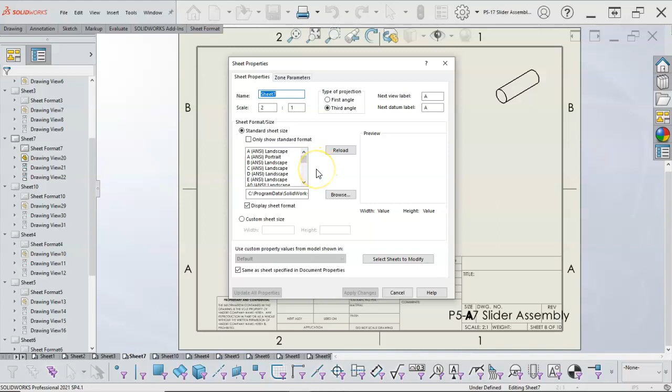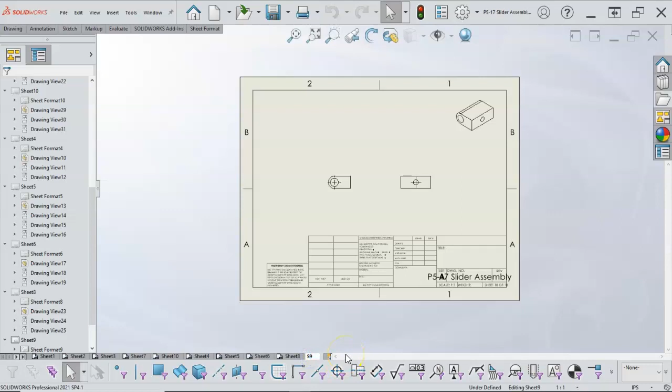What happens is the sheets get a little bit out of hand, taking over the bottom here. So sheet 1, 2, 3, 4, 5. Since I know that that is sheet 9, I could rename it to S10, and then go through, right click, rename S9, and shorten up those names to end up with quite a few more tabs.

In the process, even though they didn't start out in that order, I'm putting them so they're pretty much going to follow the order I'm setting for them. So S6, and then S5. You get the idea.

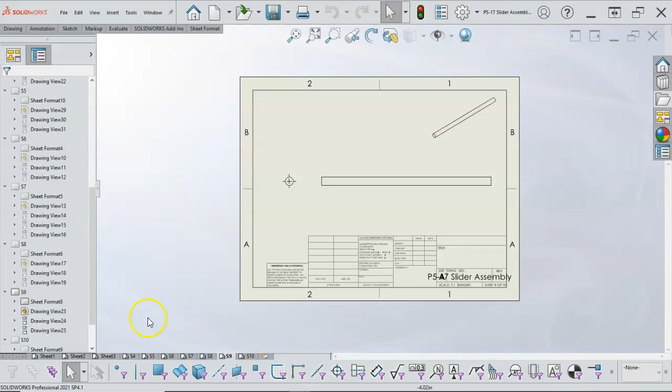All right, so going through that process of organizing it—we're really not setting anything in stone here. So the next step would be to get some basic dimensions in place.

Now when we're going through the options, let's see where that's at. If we go to model items, there are model items that come in, and I think it was probably more on the support that we saw that. So in our list of things we can import, marked for drawing—well, we uncheck that, and a lot of our dimensions are in purple instead of black because they're not automatically marked for drawing.

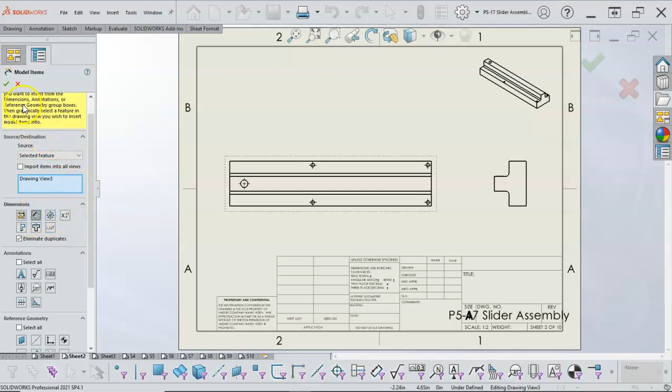But this would be the place that if I had that notation, I'd want to check for it. So maybe something like 'not marked for drawing,' and let's see what that gives—just import from. All right, so we got a few of the dimensions. Notice it's converting from metric to standard.

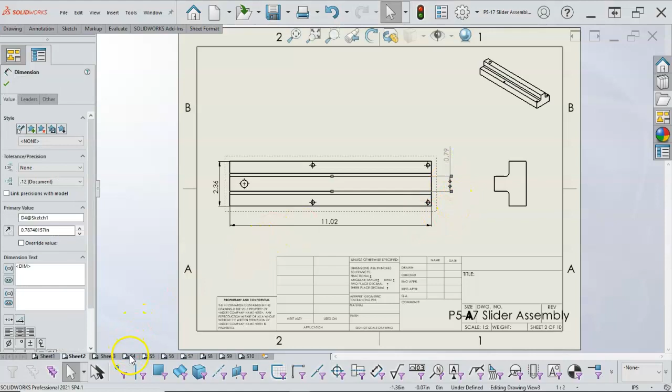So let's jump over to that support. In the annotation, model items, we'll just leave it for the marked for drawing. Maybe I didn't mark them—okay, so we got some of the dimensions. Could probably lay that out a little bit better.

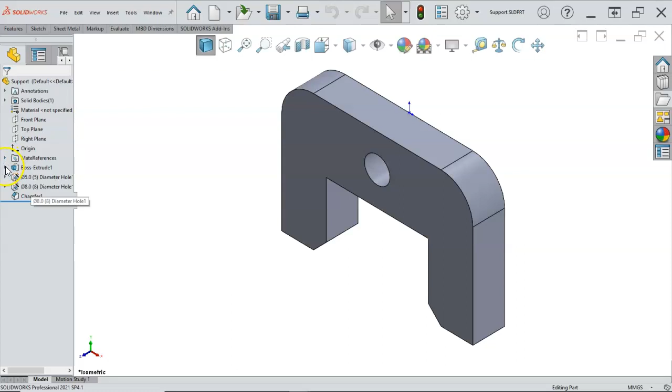The interesting dimension was from there to there, so I was going to see if it came over. If I want to check that real quick, I can right-click, open the part, and we'll go into the boss extrude.

So that one was highlighted—it was marked for drawing but did not necessarily show up. There's still some issue with the logic. So these are showing up as kind of a baseline dimension.

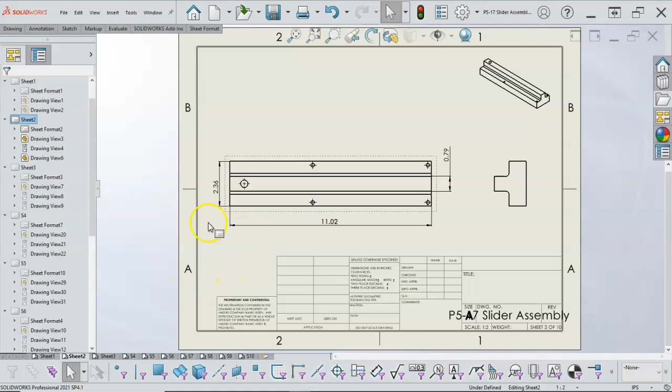Let's see where that attached at. So that actually attached at the midpoint, and that one attached at the midpoint too—that's kind of strange. And that one's on the offside. So as usual, I'm not real thrilled with my automatic import.

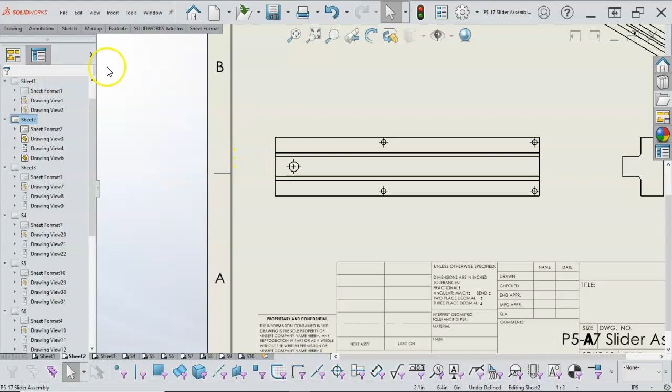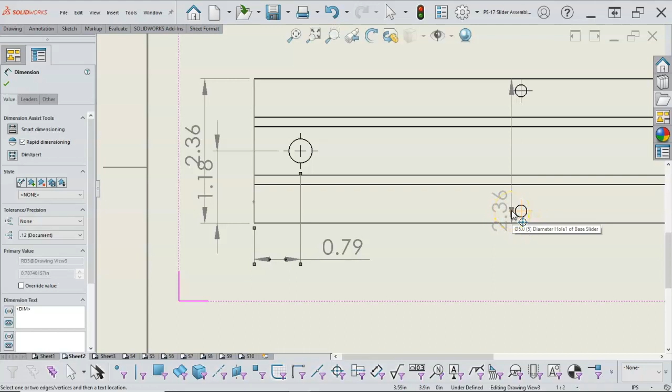So that being the case, I would rather just go into the annotations, pick up the smart dimension, and start thinking about the things that I'm interested in providing for the dimensions. Keep in mind that the crosshair for any center has a horizontal and a vertical component. So if you can't see it or grab it easily, make sure to zoom up so that you're picking the vertical, otherwise the horizontal will just give you probably a 90 degree. So if I were to pick more toward that side, 90 degrees, more toward that side, a linear dimension.

Since I'm not really using the layers and won't have that contrast at this stage, I'm going to forego going all the way across and maybe put the 2 times symbol or something along those lines.

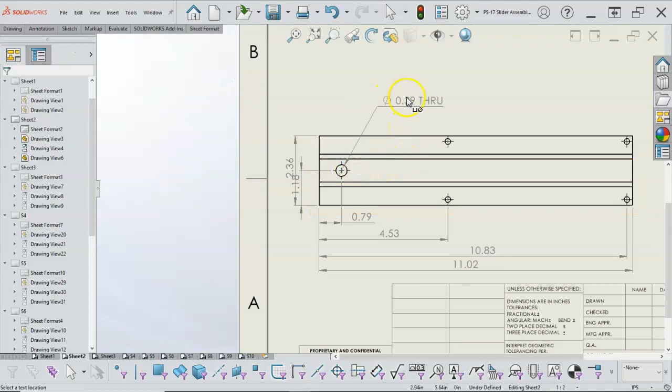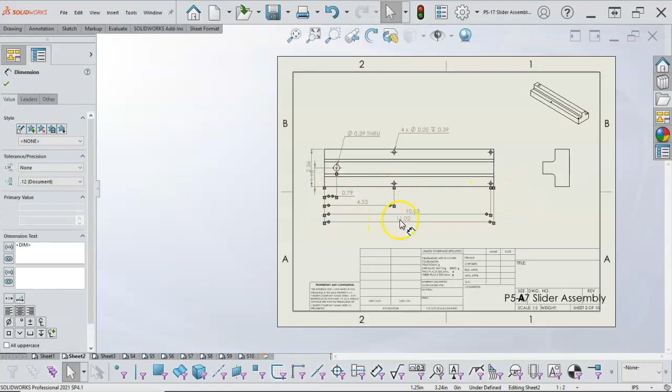For the holes then, we'll go back into the annotation and see if they were done with the hole wizard. They should have depths and through notations—not always, but sometimes it will pick up the boss base extrude. So if I move that up a little bit, one of the things we can do is window pick and right click, and in the display options we'll just tell it to center the dimensions on their extension lines.

Keep in mind that this is the ISO standard. If you prefer to work in ANSI, then those are available.

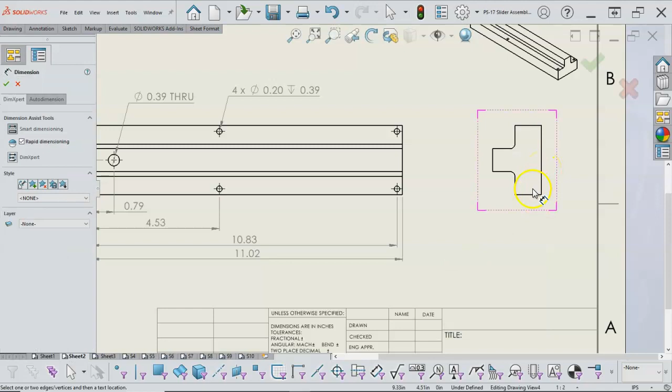All right, so right click and we'll come back over to the smart dimension. We already have that dimension, so for a height and then an overall, and a distance—really didn't give it, we gave it the point. No, I took the 0.79 off. So I've got to think about how I would want to utilize that.

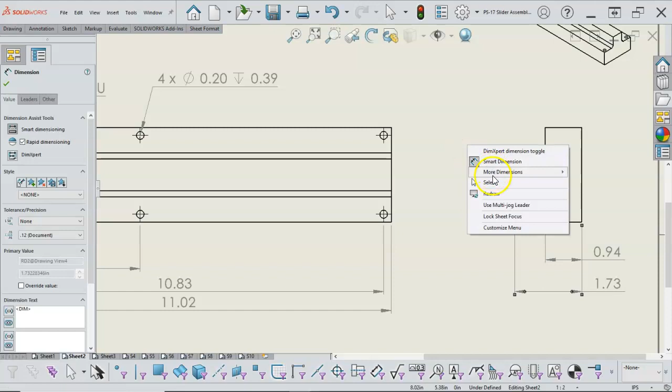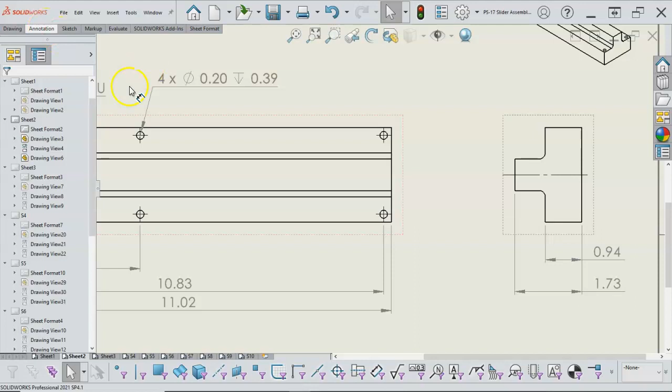So if I go back into the annotations and pick a center line and pick the 2 sides, then I can extend that out. I think the 2018 standard moved away from using the symmetry or the CL. So really, what's going to be required here is the half dimension and then the full dimension. We kind of did that with the center mark, but I don't know that we can make that assumption.

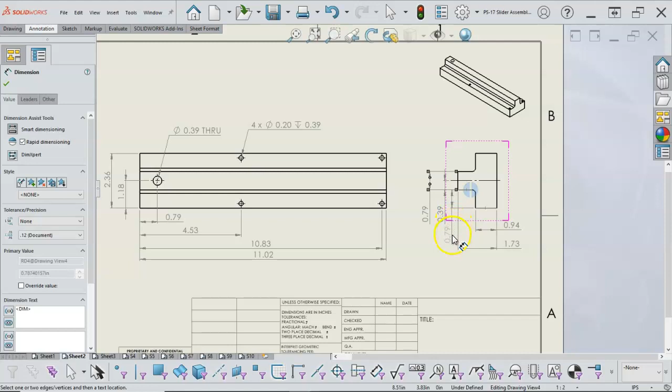So we would either need a dimension to the edge, which would be a physical measurement. That would probably be the safest. And we'll place that there so that I can at least get a rough start with it.

And then the stack up—if I did this number plus this number plus this number, that equals that number. So that would be a duplicate dimension on that side. That redundancy is not going to help us.

And then the smart dimension for the radius, and we could put a 2 times on that—I jumped away before I could get the little box, so 2 times. Now if it comes up with 'you're modifying the dimension,' you hit OK, or there's the 'don't show this again.' I usually check don't show this again. I know I'm modifying it, and if I don't like it, I will have to go back and fix it.

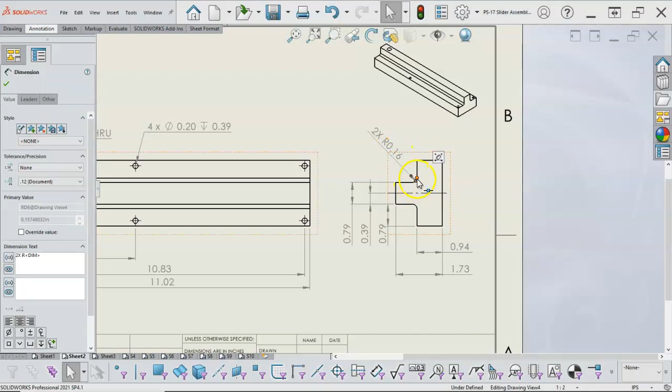All right, so clicking on the dimension, you have the handles for the arrows inside, outside, and can place those dimensions.

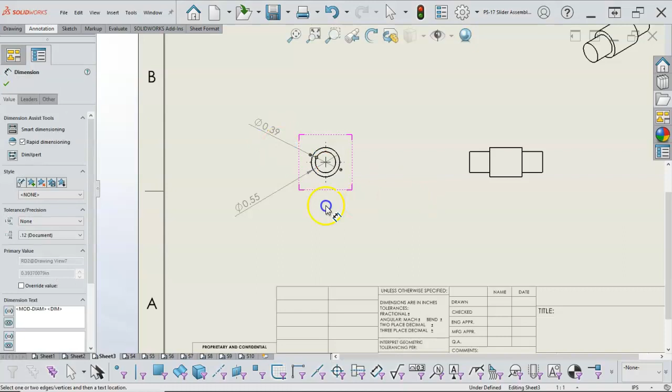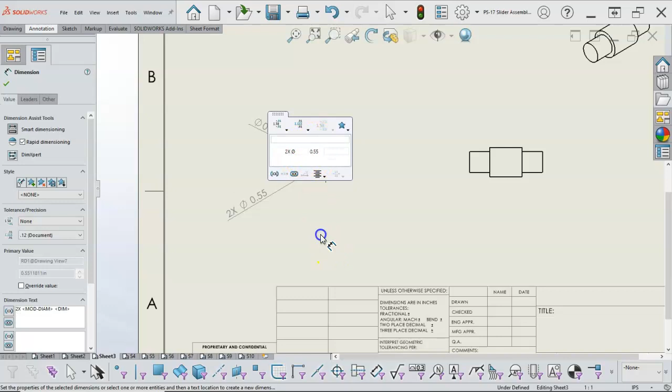For our sizing then, let's get into the smart dimension. We'll have diameters are diameters, radiuses are radiuses, and again that one with the 2 times. So if I were to—let's see where it's going to put that—so that's above it, and that doesn't look terrible. I don't know that it fulfills the standard as I'm used to it. So, space-wise, we have enough to go linear, so I think I'll go that route.

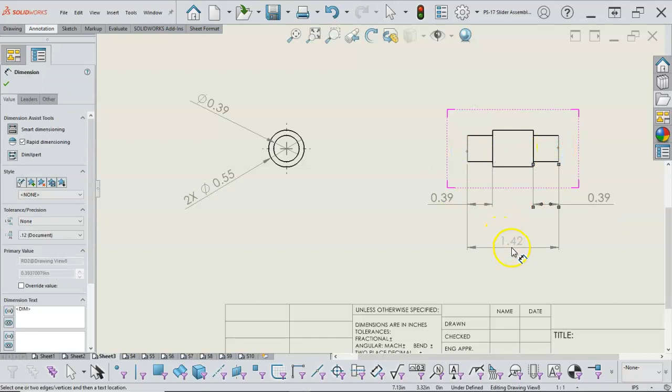And then for the sizing, so we could go that way. Looking at the stack up, I think probably doing the two ends, and I'm getting that silhouette edge, that little cylinder with the line through it—shows me the silhouette edge. And then for reference, I want to go back to the center line and pick the opposite so that I get those. Drag out a little bit so it extends through the rest of the geometry. Hit OK.

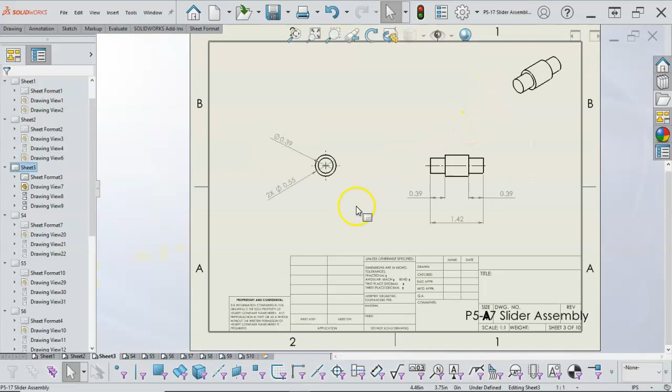So looking pretty good on that one. Pin shouldn't be too much to that, so diameter. See if I can find that edge. There we go. Silhouette edge, 0.63.

And then this one had a few more of those that came in under the format, model items that came in. So this would be a good place to use the dimension filter. And with a little funnel, I can window pick, hit delete, and it leaves my geometry. F6 will turn it off, or I can come down and pick the icon again.

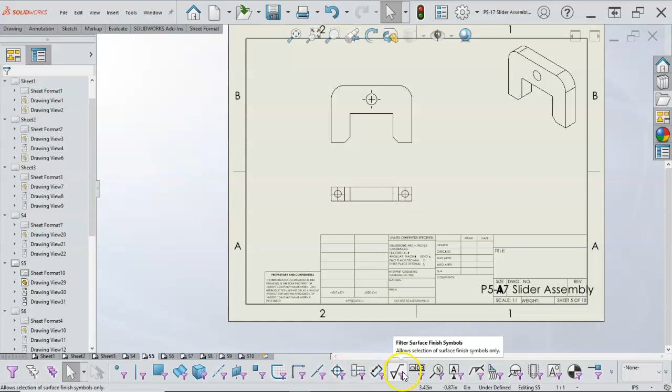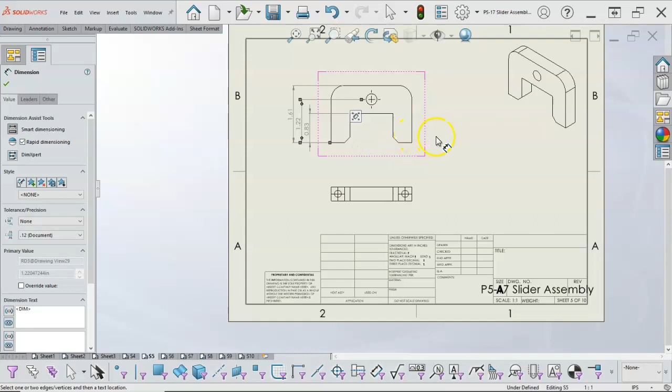And then we'll be into the smart dimension, and we're just going to go through and pick. See what we have there.

So one of the notes, or when I was designing, producing this, was the possibility that there might be an internal radius. Let's make it up to 0.25, if needed.

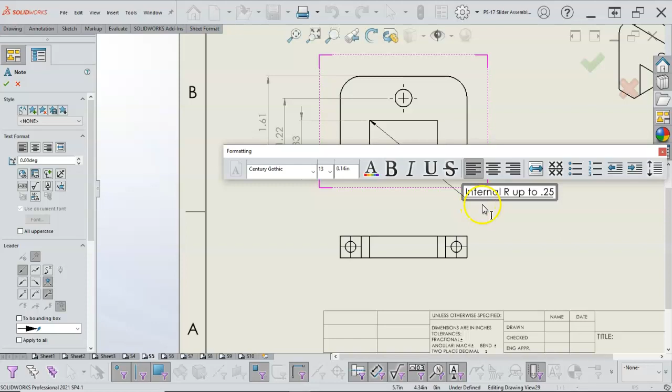Okay, and then we can go back into our smart dimension, and we'll pick up from those points.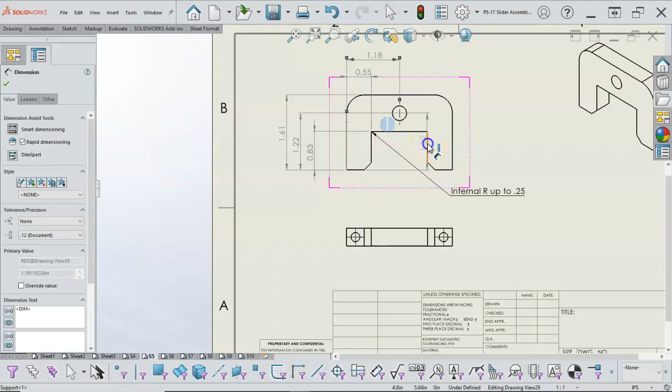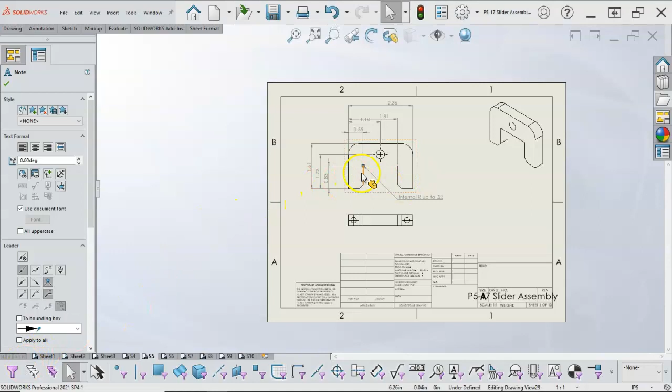Okay, so rough positioning all of the dimensions. Get as many of those in place, and the note was in effect applied to the view. So as I move the view, the note should travel with it. If it doesn't, then it was applied to the sheet, and we need to go back and check that one. But this should be okay.

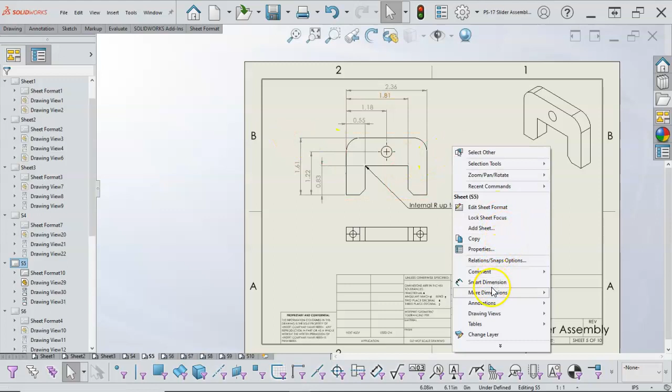So again, rough positioning, there is a chamfer dimension. So under more dimensions, chamfer, I'm going to pick that edge and another edge. That's going to give me the notation for the 0.16. If I highlight it, now let's go back, right click, select, let the little box pop up, then I can give it the 2 times.

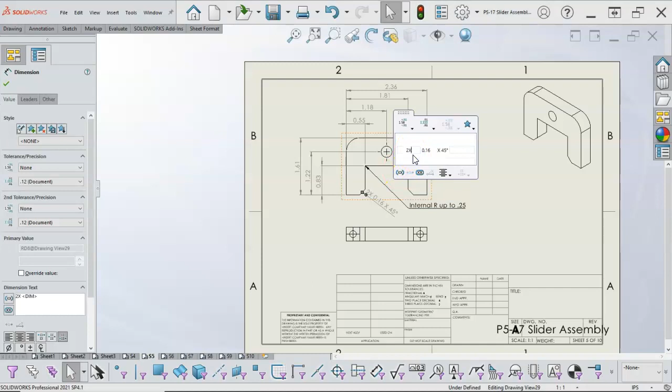And we'll position it again. Let's see, what are we missing? A diameter dimension. And then the radius. So maybe we'll go in with that one 2 times.

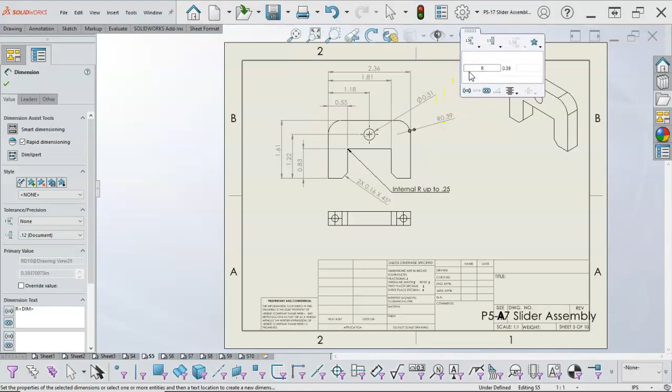Okay. And then off of the side to the vertical, 0.20, to the other side, and then we need an overall, and then to the center line. So notice that

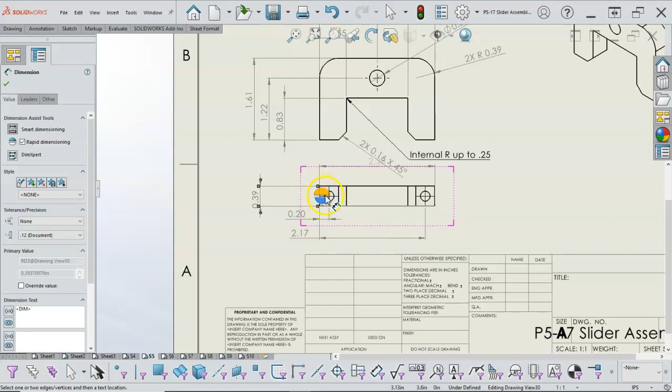the orange and the blue are letting us change location. That's not really what I wanted to do right now, but that gives me the option for those extension lines. So kind of center those up a little bit, and then one more dimension.

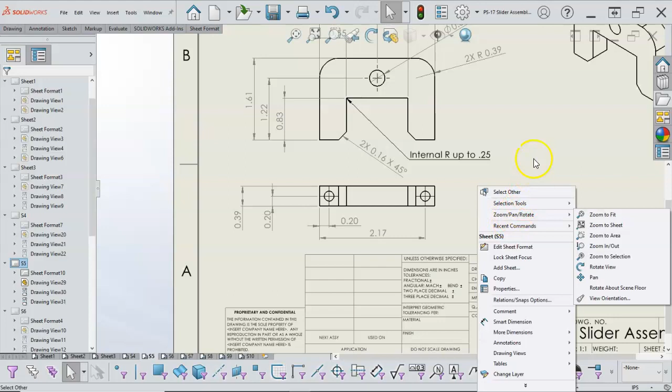And let's see if the hole call out is not on the more dimensions there. So we'll go back up to the annotations and find the hole call out.

So since I use that one quite a bit, that might be one that I would go search for in the tools list and find a place to put it on the S key or one of those. So yep, still not seeing it. So if we were to make a modification, that might be a good modification or customization to the part.

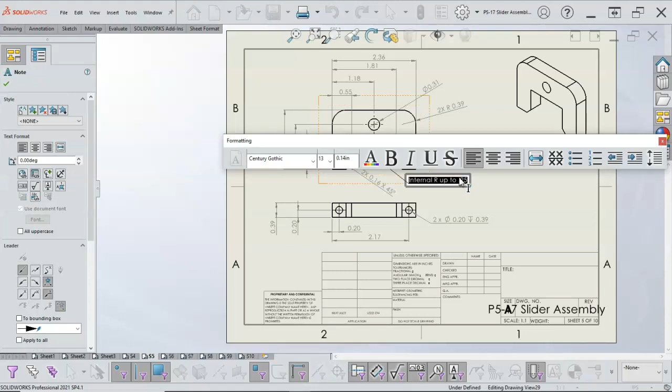So with the note, if we go into those colors, yeah, it's in the darker. Let's switch it over to a gray. And really our layers and the dimension layers would take care of that for us.

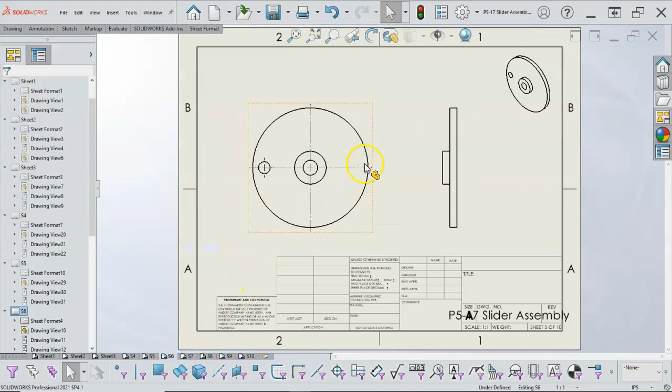All right, so keeping on with the process, smart dimension, and these are through, assume through. And since it's on the center line, we can also make an assumption that it's assumed horizontally, or aligned horizontally.

And picking edges, nope, that one already has a diameter. So from there to there, select, we can position that a little bit better.

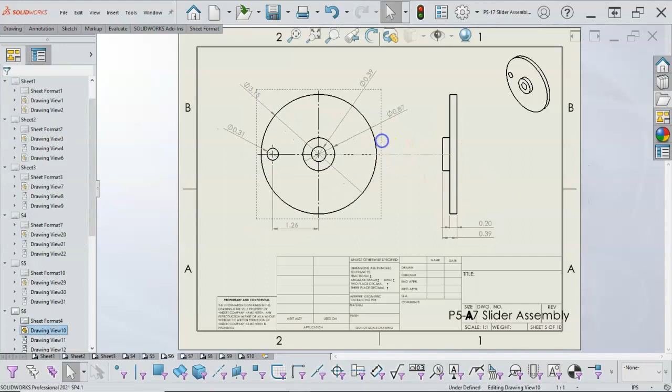All right, and I'm not too worried about missing dimensions. This being the second pass is to get the majority of the dimensions in place, and then we'll come back on the third pass and start to look at tolerances and catch those things that we might have missed.

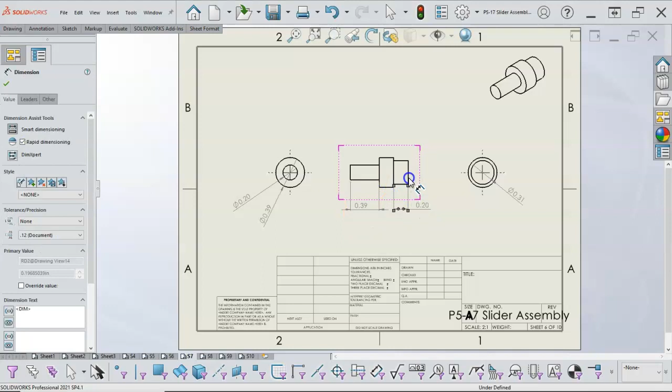Okay, so overall, I'm just going through and picking, and then an overall dimension. Nope, Control Z, get back into the dimension. Missed it again. All right, so second time I'm going to go ahead and zoom up on it and make sure that I'm highlighting and some of those visual icons are not getting in my way.

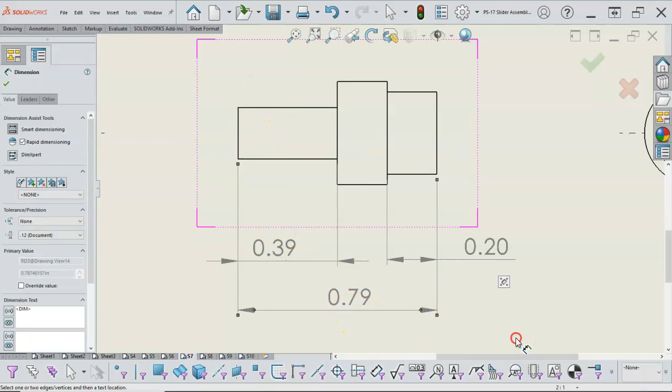And if that one's the front, then the other two should move with it, or the primary view, I guess would be a better way to say it. Okay, we mentioned the break lines.

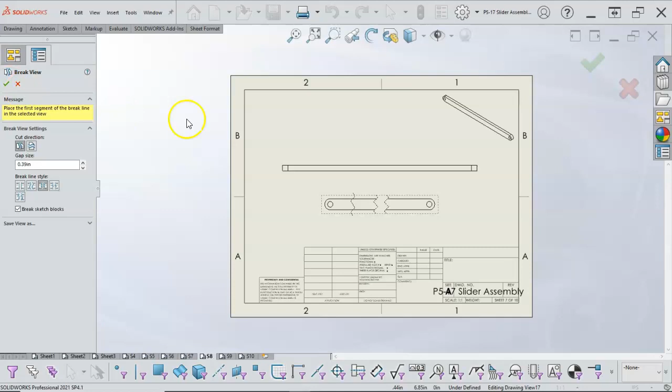So with that view highlighted, in the annotation? No, it's going to be under the drawing. I want to break the view. And then we have the different break line styles with a gap of 0.39 or 10 millimeter. So if we position the first one, position the second one, it would be nice if the top did the same thing, but maybe not. I'm not sure if I've done that before.

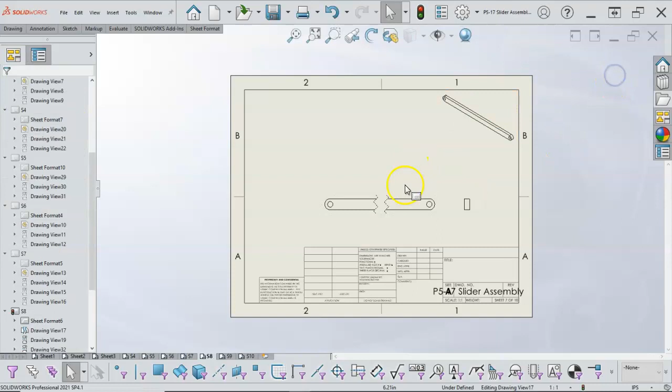So anyway, with it broke, now I can get rid of that view and project a side view. Maybe that makes a little more sense with the smaller envelope going. All right, so with the broken view and the dimensions, we're still going to be able to, and since it did not put the center marks in for some reason, I need to jump over, pick for the center mark.

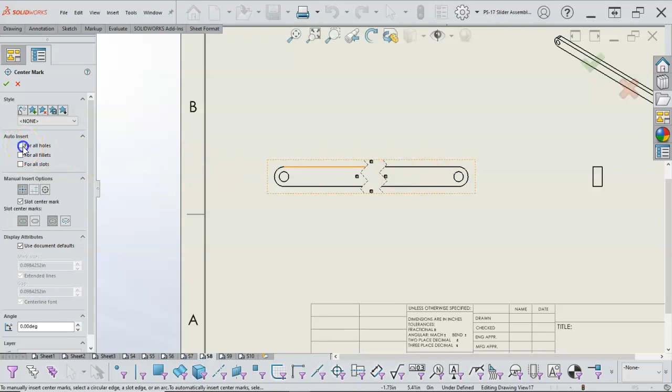All right, so let's just go for holes, selecting for the view, so I'm not sure why it's not allowing for that one. Interesting. Don't know that I've run into that one before, so let's try one more time. For all holes, pick the view and accept it.

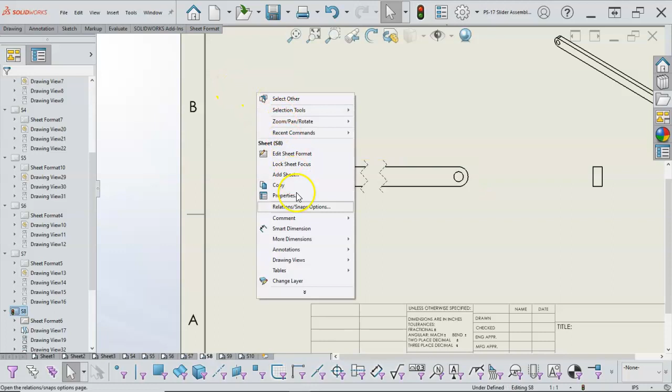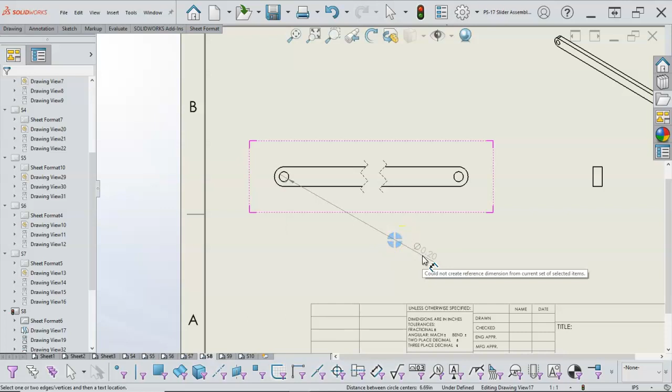Yeah, maybe the break did modify something there. So, well, we can go Smart Dimension and Overall, and Place. Well, okay, could not create reference dimension from current set of selected items. Really? So that's interesting.

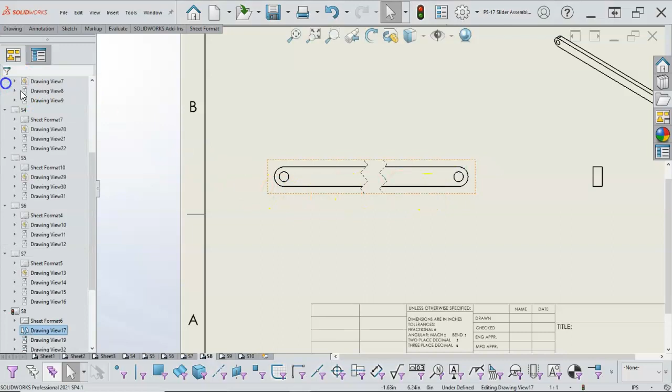I've never had this problem with the break view before. All right, so assuming that the break view is the issue, we'll highlight, go to drawing 17, drawing view 17. Make sure that that's the one that's highlighted. 18. And under one of these, it should show the break. Now let's go ahead and rebuild it. Since there's a rebuild sign there, I don't know that that would cause it, but

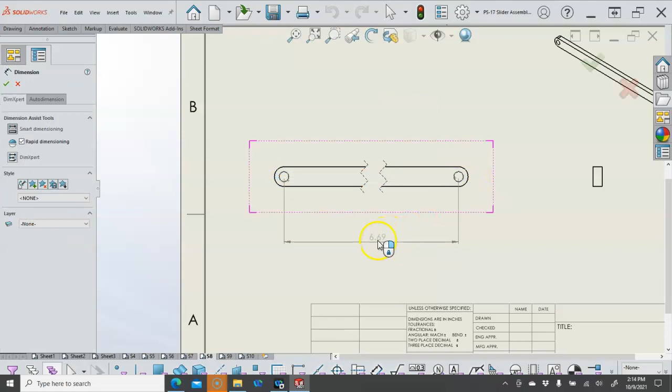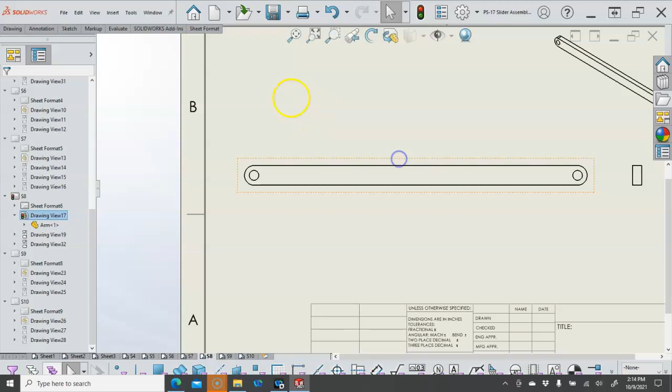still not allowing it. So let's right-click and unbreak the view, and we'll get rid of our break lines. And it's showing up, so I'm going to have to look into that one. Not quite sure what's going on. Now that did a center at the points. Alright, so center marks for all holes. Still not finding it.

Well, let's see if we can apply dimensions. This is going to be one of those weird cases that it's doing everything but. Alright, and then if I hold down the shift, I can get the overall. You kind of have to decide, well, the radius of 200, we could make that a full R. We could also put in the width. We're going to be on the edge of the duplicate dimensions here.

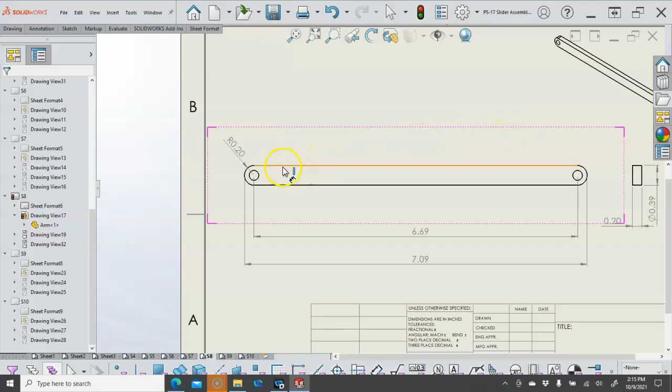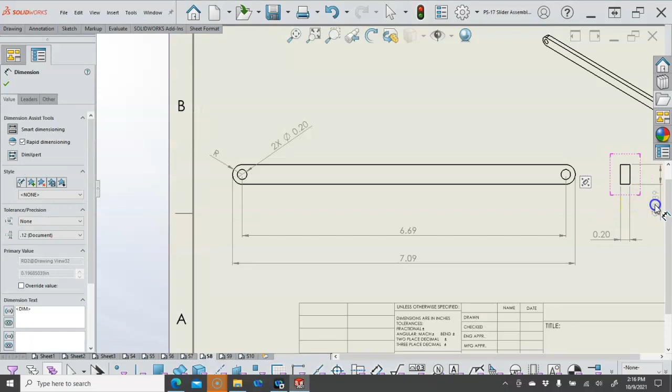So radius of 0.20, and then the hole size, so 2 times there, and 2 times there, or like I was saying, if we were to do away with the dim value, so let me have it out there. Alright, so overwriting values, yes, I want to continue. That was also the do not show again. Alright, so we either have a note that is full radius, or R, related to the thickness of what we end up with as the width of our part.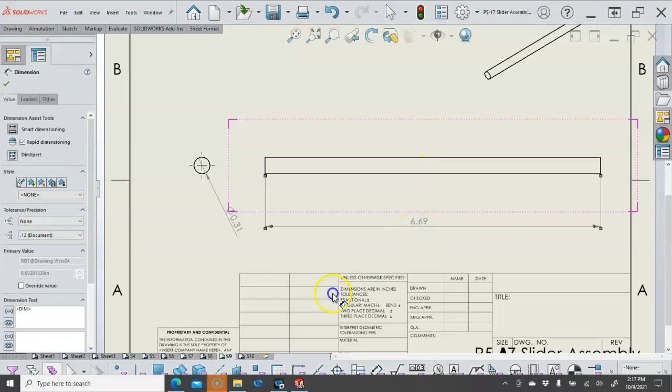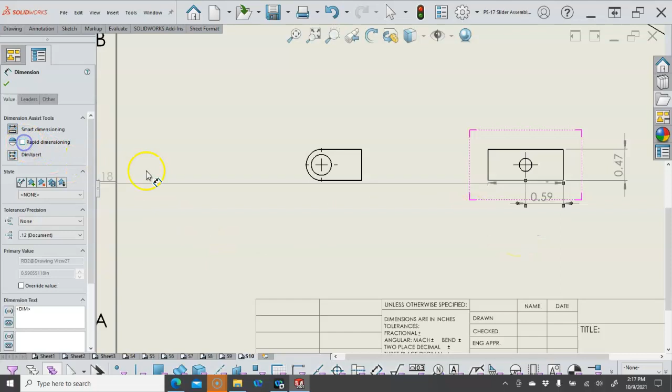And then smart dimension, diameter, length of the rod. And looking for that corner, or that silhouette edge. And then we have probably the full radius again. So smart dimension, put in the width. And the rapid dimensioning, that little dot dot is set to there. When it starts getting in my way, I'll go uncheck it, especially if I'm not really utilizing it.

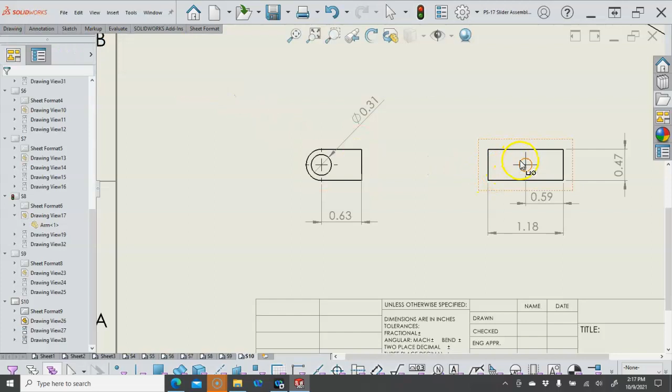So 0.63, we have the 0.47, that one's through, and then back to the annotation for the hole callout, and then we should be able to pick that one up with its depth and location.

Alright, so famous last words, I said this probably shouldn't take as long, but ran into a few issues, unexpected issues, which is kind of par for the course, but that makes a good second pass.